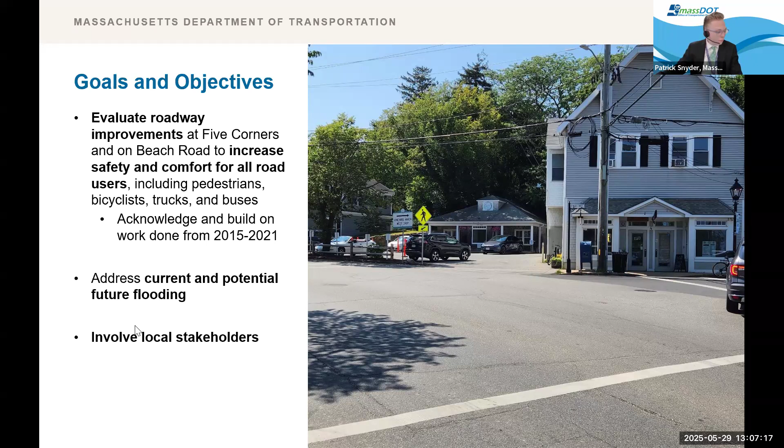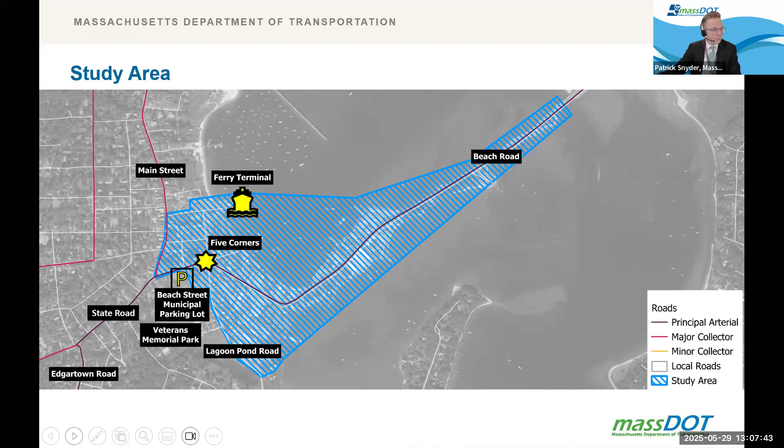We'd now like to review our initial flood vulnerability assessment. Based on our review, the existing drainage system at Five Corners is key to any flood mitigation work done at this location, as well as the current flooding that occurs there. Outfall pipes in the study area are located at Beach Street Extension, Lagoon Pond, Main Street, and Beach Road. These pipes form part of the stormwater management system by facilitating drainage off of streets and properties.

MassDOT and the town of Tisbury have identified challenges with the existing drainage system that make it difficult to manage stormwater. Low elevation, effectively at the current sea level, makes it vulnerable to storm surge. Flooding regularly occurs at Five Corners due to backup at the Beach Street Extension outfall pipe, as well as drainage that slopes toward Five Corners rather than coastal outfall points at Beach Street Extension, Beach Road.

The Beach Street Extension outfall pipe also gets blocked up during storm events, which contributes to backflow and more drainage challenges. MassDOT has proposed drainage improvements under our Highway Division project number 609459 - that's how we categorize our projects - to help mitigate stormwater at Five Corners and the current flooding that happens there. As you'll see on the following slides, stormwater challenges are exacerbated by future year flood vulnerability under climate change.

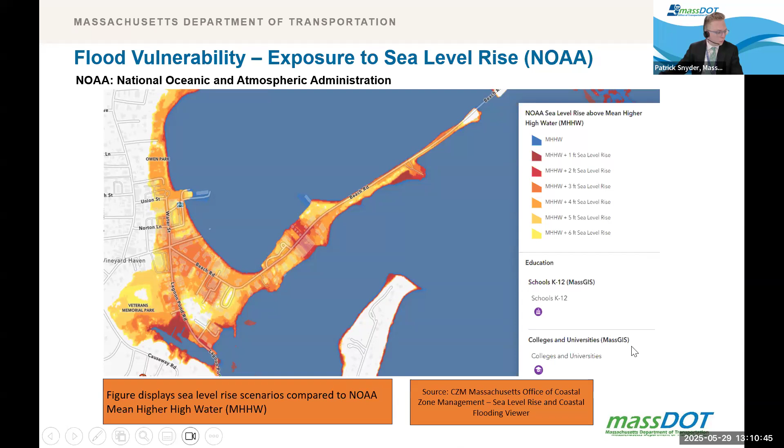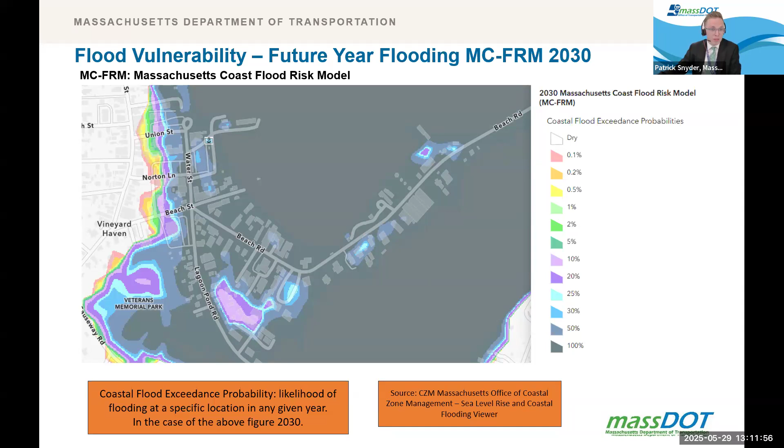Any potential future projects to address flooding in this area would likely require coordination with CZM, as this is a coastal area. Coastal flood exceedance probabilities shown in this figure are between 0.1% and 100%. Most of the study area is projected for 100% flood exceedance in the year 2030, meaning more significant flooding at Five Corners than already occurs, expanding across more of the study area - indicating that during a storm event, most of the study area will be flooded beyond the area it already floods today.

As part of this planning study, we carried out flood modeling in order to review potential horizon years to plan and develop concepts. Per direction, we used the Resilient Mass Action Team model, which is a risk screening tool developed as part of the state's resilience planning initiative, Resilient Mass.

RMAT, for short, is a preliminary risk screening tool that outputs results based on categories assigned to assets, such as their critical operation during emergency events. Assets being transportation infrastructure, buildings, and natural resources, to name a few. There are quite a few inputs that you can select.

Inputs to this tool for this study resulted in target planning horizons of 2030, 2050, and 2070. These are suggested planning years that RMAT suggests we take into account when we're planning for resilience and climate change.

Mean high water level, a measure that indicates the highest level water could reach for these years, was a minimum of 3.7 feet for sea level rise in the 2050 year as output by RMAT. And this would be during the highest high tides. It could be a little bit lower than that at times, but it's projected to be at 3.7 feet during the high tides in the 2050 year, normal high tides.

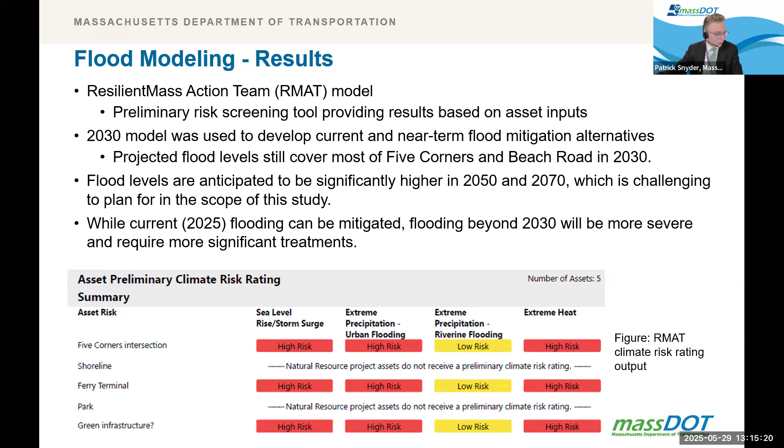At this point, I would like to pass it over to Joe Zissman from our consultant team at Cambridge Systematics to give an overview of the safety analysis, which helped inform subsequent alternatives analysis for roadway improvements in this study. Thank you, Patrick.

We analyzed crash data from the period between 2018 and 2022 for the study area. In that time, one fatal crash occurred: a nighttime head-on collision of two vehicles on Beach Road near the Lagoon Pond Bridge. Two injury-causing crashes have occurred at Five Corners, one involving a pedestrian, the other involving a bicyclist. The study area as a whole saw 18 additional injury-causing crashes.

Three clear crash clusters occurred in downtown Vineyard Haven between 2018 and 2022. The first was at Five Corners in the Lagoon Pond Road leg, the second on Water Street northbound at the access point to the ferry terminal, the third on Beach Street where it intersects the Cromwell Lane alleyway and the municipal parking lot.

Five Corners is designated a top crash location in Massachusetts, and a road safety audit was carried out at this location, which was a precursor to this study.

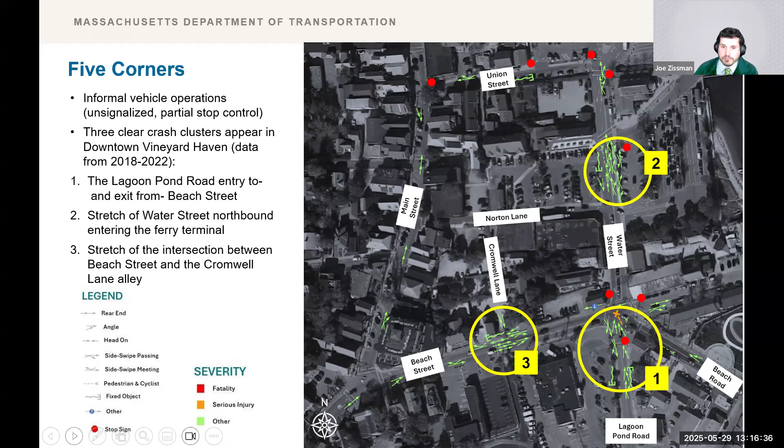The study area sees a large volume of pedestrian traffic. The village center is a business hub for those who visit Martha's Vineyard, live there, and work there. It has a ferry terminal with service to Woods Hole, the island's primary post office, a full-service grocery store, and the Black Dog Tavern, in addition to many other small businesses and a small number of residences.

Sidewalks and curb ramps are not always sufficient for pedestrians. Some are narrow or obstructed with poles. Brick sidewalks can be uneven for those with mobility challenges. Crosswalks and the ramps leading to them are not perpendicular to the road and are not clearly marked for accessibility. No pedestrian flashers or other pedestrian signals exist. Street lighting in the area generally is poor.

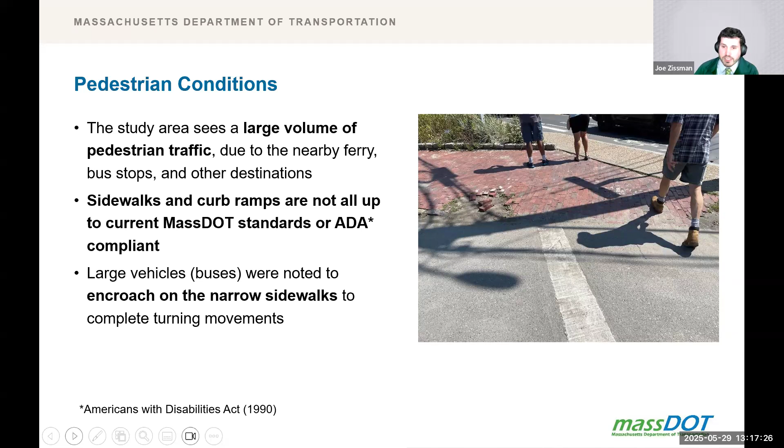Some of the turns are also too tight for the large trucks and buses accessing Water Street in particular, and we observed those vehicles when we were on site mounting the sidewalk in some cases, which is a dangerous situation for pedestrians. The study area also sees a large volume of bicycle traffic.

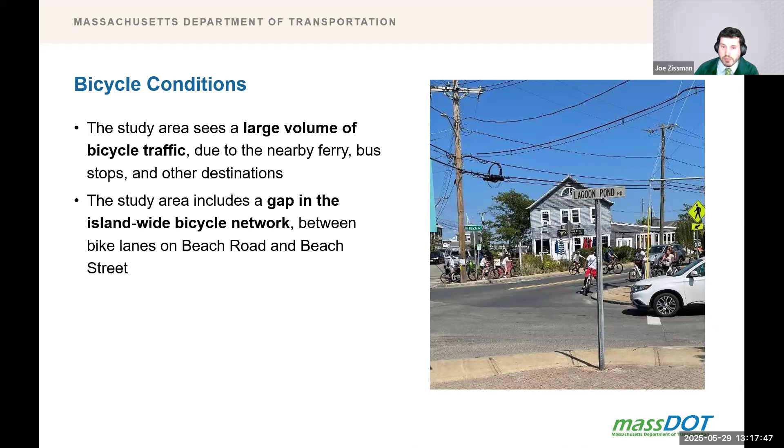This is driven not only by the destinations in the area, but also by the strong commitment from Martha's Vineyard communities to building a robust bicycle network. But a gap in that network exists in the study area. There's a missing link in the island-wide shared use path network between Oak Bluffs and Edgartown through Five Corners.

On the basis of this analysis, this study discusses high-level conceptual design alternatives for the study area. The alternatives have two components that mirror the two components of the analysis. The first, safety and road treatments, focuses on improving multimodal operations and safety, primarily through changes to roadway geometry, signage, and control. The second is adapting to and mitigating the impacts of near-term flooding.

While this study analyzed and considered long-term flooding, as Patrick mentioned, more significant analysis will be required as part of any project development. The conceptual design alternatives are presented as short-term, medium, and long-term. They consist of improvements at two locations: Five Corners, and Main Street and Beach Street. We'll present the alternatives for Five Corners first.

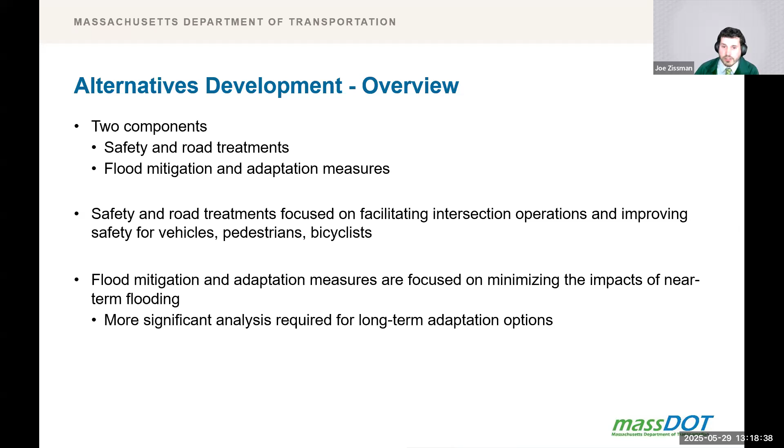The short-term alternative for Five Corners includes rebuilding sidewalks to be ADA compliant, including curbing and curb ramps with tactile strips, realigning crosswalks to be perpendicular with the street, repainting all crosswalks to improve visibility, installing indicator signs for crosswalks, potentially with rapid flashing beacons, and repainting stop lines on Lagoon Pond Road, Water Street, and Beach Street Extension.

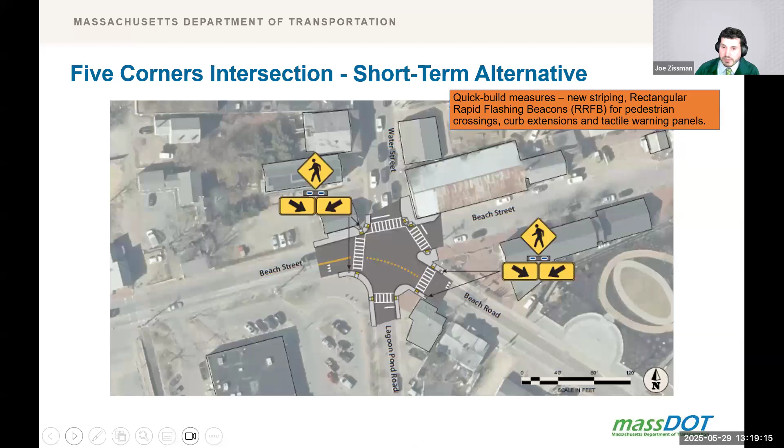Also included is painting new shark's teeth yield lines on approaches without stop signs, and painting a curving yellow line that connects the center lines of Beach Street and Beach Road. All of those are designed to be relatively low cost and implementable relatively quickly.

The medium-term alternative for Five Corners includes the low-cost, quick-build measures from the short-term alternative, but makes two substantial changes to roadway geometry. First, Water Street is narrowed from three lanes to two, which allows for the construction of a shared use path for pedestrians and bicyclists. Second, Beach Street Extension is raised and turned into a shared street for cars, pedestrians, and bikes - also known as a woonerf, which is a Dutch term.

The street would have pavers instead of an asphalt surface and would be accessed via a ramp-like sloping sidewalk from the level of the intersection. This has several benefits. First, it creates a clear physical through line from Beach Street to Beach Road and simplifies the apparent complexity of the intersection from five legs to four.

The raised surface also potentially allows for stormwater storage underneath Beach Street Extension and resloping of the outfall toward the end of the street to improve drainage. Access to Beach Street Extension would be maintained for all adjacent homes and businesses under this proposal - it would just appear less like a typical street and more like a driveway.

Two long-term alternatives were also developed for Five Corners: a stop-controlled intersection and a roundabout. The stop-controlled option differs from the prior alternatives by making more substantial changes to roadway geometry and alignment. Specifically, Lagoon Pond Road is curved, so the intersection becomes more perpendicular, resolving the current tight turning radius that brings trucks onto the sidewalk.

This alternative also includes a shared use path on the south side of Beach Street and Beach Road, which is accomplished by narrowing Beach Street to two formal lanes. This alternative may require additional right-of-way, which would be evaluated during project development.

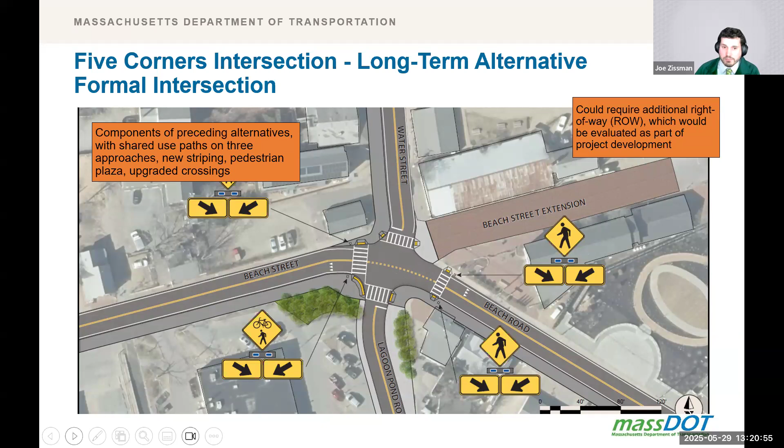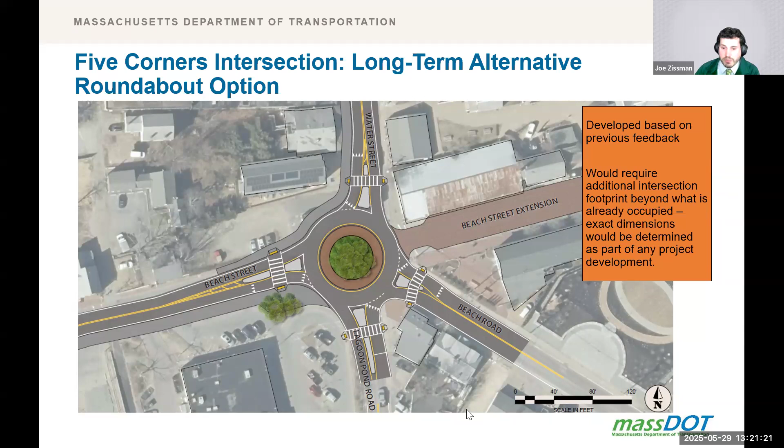A roundabout option at this location has been discussed in the past and would require substantial additional footprint beyond the current extent of Five Corners. What is shown on the screen is one possible location where a roundabout could be centered, but the center of that roundabout could be moved elsewhere in the general intersection vicinity. Note that the width of the Beach Road approach at the roundabout prevents the inclusion of the shared use path under this scheme on Beach Road.

A single set of improvements was developed for the intersection of Beach Street at Main Street and also State Road, consisting of quick build improvements to sidewalks, ramps, crosswalks, and roadway markings in much the same style as those at Five Corners. A long-term enhancement, which is not drawn, could extend the shared use path from the long-term Five Corners alternatives through this intersection on the south side of Beach Street and potentially onto State Road.

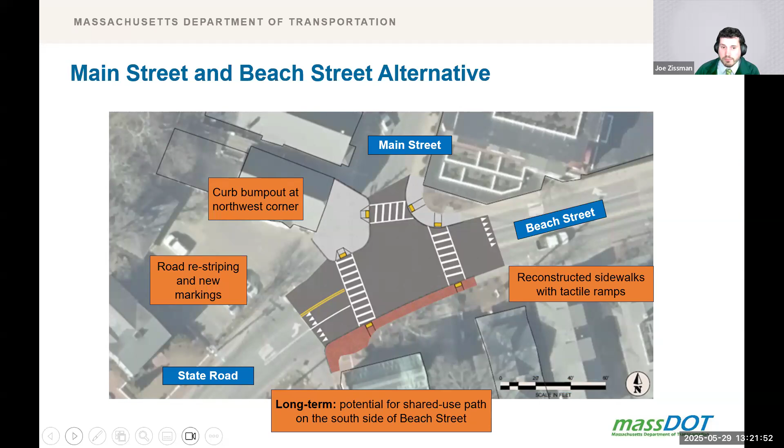Patrick will be taking you through the alternatives analysis, which includes a discussion of infrastructure elevation. Five Corners currently sits at approximately 2.5 feet above mean sea level, and that was mean sea level in 1988. It's also referred to as NAVD 88.

This study considered raising the intersection in the long term to either 5 feet above NAVD 88, which is 2.5 feet beyond the current level of the ground, or 5 feet above the current ground level, which is 7.5 feet above NAVD 88.

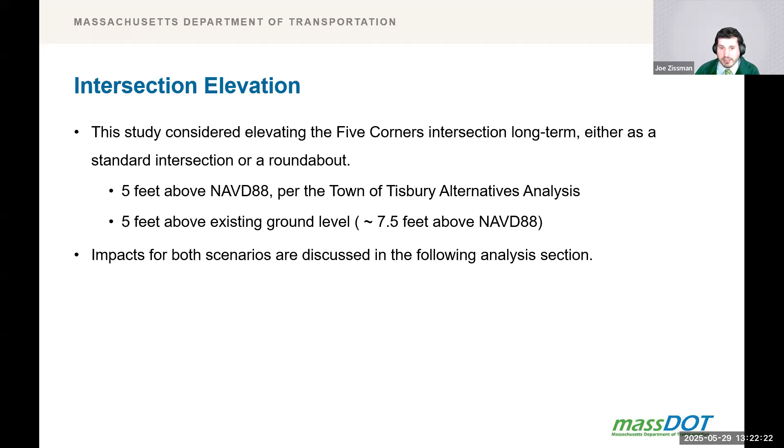So thank you, Joe, for taking us through those alternatives.

At this point, we'd like to review our alternatives analysis, which is an outline of anticipated roadway impacts, as well as wrapping in potential flood mitigation measures and discussing the effects of the flood projections that we reviewed.

In terms of anticipated impacts related to roadway elements, we've split these up amongst the short-term, midterm, and long-term alternatives.

When it comes to the short-term alternatives, these are anticipated to result in safety and operations improvements for pedestrians and vehicles at this intersection. They would upgrade Five Corners to current MassDOT standards and create new ADA-compliant pedestrian infrastructure.

Short-term alternatives would likely be insufficient to address the current turning radius challenges for large vehicles such as buses and large trucks. The short-term alternatives are conceptualized within existing right-of-way.

I'll note on this and the next slide that potential right-of-way impacts are fully evaluated later in the project development process, which would follow this planning study.

The midterm alternative for the Five Corners intersection is anticipated to have the same impacts as I listed for short term. The midterm alternative builds off of the short-term alternative with some additional improvements, a shared use path along Water Street, and a potential raised shared street at the Beach Street Extension, which would increase comfort and safety and an overall more welcoming environment for pedestrians and bicyclists.

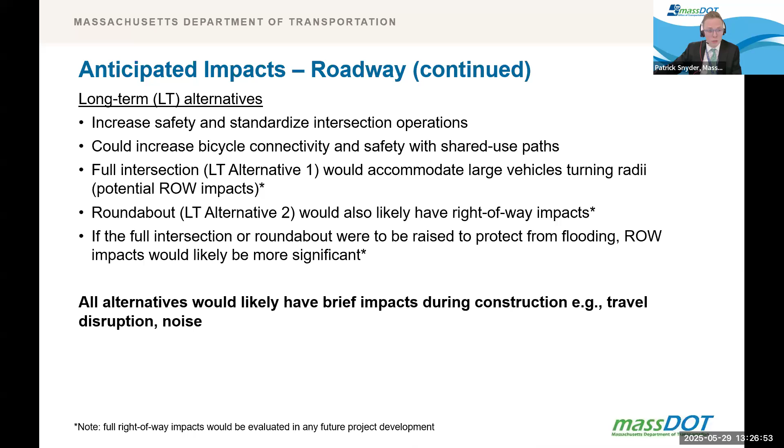As I mentioned on the last slide, there would likely be the typical temporary impacts associated with construction activities such as noise and access for the long-term alternatives as well.

Just to give an overview of potential costs, we've developed high-level summary cost estimates with unit costs based on 2024, 2025 dollars and based on historical MassDOT cost data. For purposes of estimation, the short-term improvements are assumed to be implemented later in 2025 and the midterm in 2027, just for purposes of the cost estimation.

Long-term alternatives did not assume a construction year as they are contingent on potentially incorporating flood mitigation measures, such as elevating the roads, and they do include contingency costs, however. These are all estimates and would be subject to change during any potential project development.

Going through the list of these numbers, the short-term improvements at Five Corners would possibly be around $322,000. Short-term improvements at Main Street, possibly $201,000. Midterm improvements at Five Corners, perhaps $2.3 million. Long-term roundabout is estimated at $3.8 million. And the long-term formal intersection would be somewhere between $1.8 million and $3.1 million.

That somewhat wider range is due to base level changes at Five Corners and potential improvements at Beach Street Extension, turning that into a woonerf shared street. So the lower end of that cost is the formalized intersection, no roundabout, and the higher end is if the midterm Beach Street Extension improvements were incorporated into that as well.

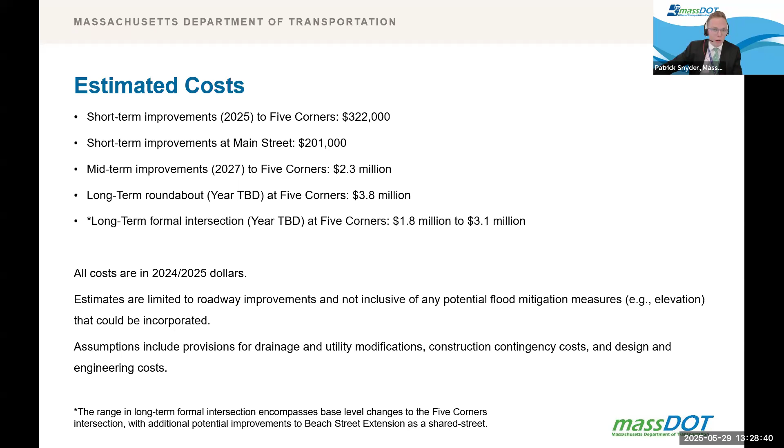Getting into the flooding side of things, we discussed a variety of flood mitigation measures as part of this study. This included a stormwater retention tank, potentially under Beach Street Extension or another location, perhaps under Five Corners itself, if Five Corners were to be raised.

We also discussed potentially elevating state-owned roadways. A stormwater retention tank in this area could provide storage capacity for floodwaters during storm events. The final location would need to be determined based on stakeholder consensus, necessary storage capacity, and would probably involve hydraulic analysis as well.

If Five Corners or Beach Street Extension were to be elevated, a retention tank could be placed under either or both of those roadways. Alongside this would probably come the need for a pump system, which would need to be maintained.

Because of the anticipated volumes of floodwaters and the severity of future year flooding that's projected, a stormwater tank might be insufficient and likely would not protect the larger, wider study area from wave action along the harbor line, which also contributes to exacerbated stormwater flooding and higher flood levels. Hydraulic analysis of those effects is outside this study's scope of work.

Along with the impacts of flooding itself, there would be temporary impacts from any construction, like noise, access issues, and possible detours. As part of any construction, there are construction-related impacts. There would also likely be right-of-way impacts to abutting properties if any infrastructure were to be elevated.

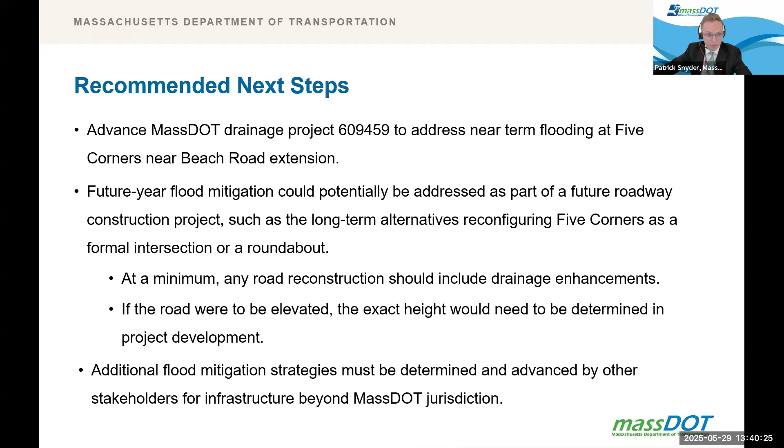In terms of what comes next: today was our third working group meeting of the study. In about two weeks, approximately June 10th, we'll have our second public meeting that evening, starting at 6:30 p.m.

Information is on the study website, and we'll give the same presentation to members of the public for their feedback.

Following that, we're going to work on organizing input on the alternatives and analyses from today's meeting, from the public meeting, and any comments received outside the meetings, to finalize study recommendations and organize next steps. Looking ahead, MassDOT will continue to coordinate with local partners.

At this point, we would like to open up the floor to discussion to you as working group members. If there are any members of the public attending today, know that you'll be able to speak after.

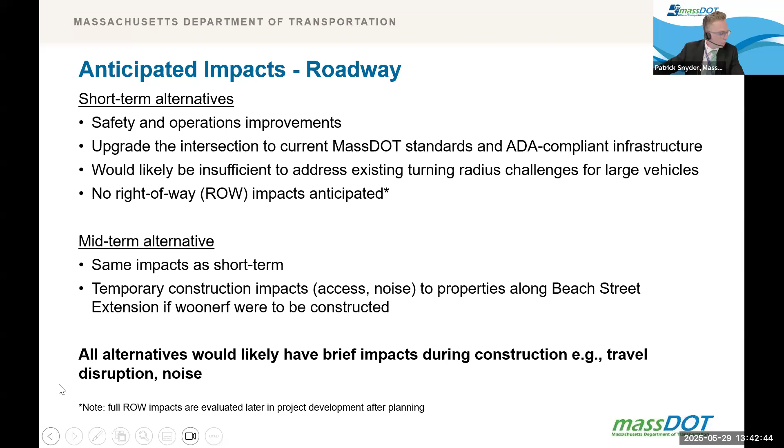This one here. So you guys are considering losing the turning lane on Water Street for the right-hand turn, which allows traffic going up-Island to make that turn and head up Beach Street instead of cars trying to turn across traffic to get to Oak Bluffs.

I think that might be problematic, especially at times when the Steamship Authority is offloading vessels and there's roughly a 50-50 split. There is an alternative route up Union Street to get up-Island, but most of the traffic flows out to Five Corners and wants to make that right-hand turn.

And if they're queued behind a car that needs to make the left-hand turn across traffic, it's going to lead to more blockage on Water Street. So I'm not sure if that makes sense. That's just one question.

Thank you. Globally, 2030 is right around the corner, and as a planning horizon for improvements, I think we're going to have to think a little bit beyond that.

Advancing the current project, part of it was utilizing town property at the old fire station lot for a retention area. There were problems identified by the state with that property. What does that look like for advancing given those issues? Is that the same as we understand it to be today?

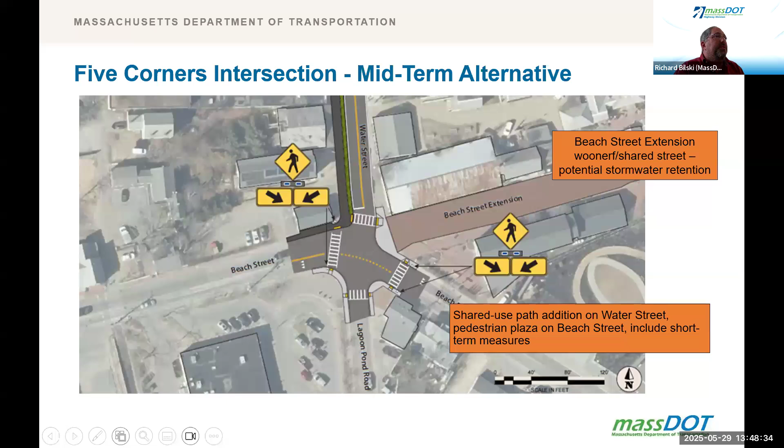Right, but if you don't raise Five Corners drainage, you can't really raise the retention above that. So that's where the coordination between a raised road next to it comes in, unless you're going to have the pump system that you guys have talked about. Personally, I think we would probably do it hand in hand, and as Pat was saying, it all depends on to what degree we think is achievable and reasonable. So maybe there's something like a smaller number that could be achieved.

So the Five Corners was raised in relation to the Beach Street extension. I don't know what that number is. As we develop a design, we could determine what that is, the ideal spot, somewhere between zero and what would be acceptable without being overly invasive on adjacent properties.

One past planning exercise the town did in 2022, we were looking at Water Street, Lagoon Pond Road, NAVD, raising it to 6 NAVD as a target elevation. In some places that's 18 inches, in some places it's 2 feet, but it's significant. That was sort of the planning target at that point to build some resilience to flooding. Right, and you could do that just based on the projections that we reviewed in this study.

If we think about it in terms of opportunity cost, you can do that, and that would help in the nearer term. But looking out at 2050, 2070, you're going to end up in the same place with more flooding on top of that 5 to 6 foot elevation, you would need to elevate it higher to a point where there would be more substantial impacts.

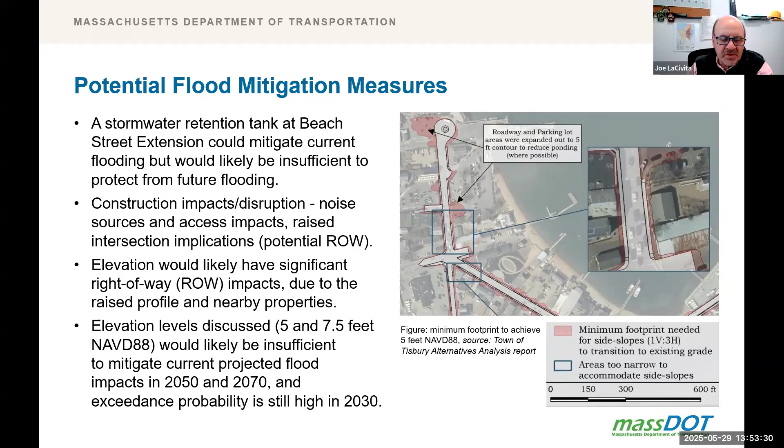Ben, you bring up great points, and some of these we discussed yesterday with Patrick and Richard. I had a preliminary conversation to express Tisbury's support in these projects and concerns along the way. One of the sites that we own is the former firehouse area, and I think we as a township have to move forward in finding funding, whether state or federal, to really look at how bad that site is, because I think it becomes a pivotal site that could be used in the future for any upstream water. But again, you bring up great points, they were all talking points we had yesterday as well.

I think MassDOT said it together, it's going to take all the stakeholders to be involved with this as we go forward, and our commitment from the town is certainly there, and it has been expressed.

Thanks, Joe. You made me think of something, Ben, you alluded to this as well, that I'd like to briefly speak to. When we talk about our drainage project, 609459 at MassDOT, flooding is a consistent problem at Five Corners now. It's been going on for years, and it continues as sea levels rise and storms get more severe and more frequent. The flooding is going to get worse. On our side at MassDOT, in terms of a near-term recommendation to address that current flooding, we have something already teed up and somewhat ready to go quicker than any long-term solution that, as a larger group with Tisbury and other stakeholders, we still need to talk about. That drainage project is teed up to try and address the current flooding to the extent that it can.

James, it looked like you wanted to jump in. Thanks for being here, sorry, I can't find my hand for some reason, but that's okay. Thanks for the opportunity.

I think there's probably an interest in other parties that aren't here too, to continue this dialogue and partnership, because we kind of started this with District 5 in 2017. We had designs on the fire station location, one of the things that culminated in a report in 2019 with the recommendations that were moved forward.

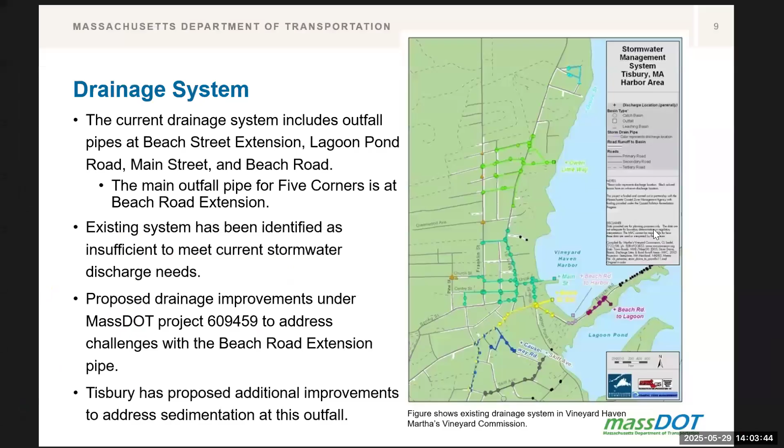Could you put page 9 up, showing the existing drainage system, so everyone can understand where this connection point is. If you look at the gap between the yellow and the green on Main Street, if you take the load coming down State Road at Main Street and branch over, you could dump into the Union Street system from the State Road system, yellow to green. You can see there's a gap there. We were saying there's a big rise, and we had to do a really deep cut to get through there. I think the small gap between the yellow and the teal or green is Main Street. Yes, that's Main Street.

I'm going to step in with a clarifying question to make sure we're all on the same page, using my hands as a demonstration. Hung, it sounds like what you're saying is that because of that gradient on Union Street, you'd have to raise all of that and maybe end up raising Five Corners as well, which brings us back to those larger right-of-way impacts as well as this being outside our jurisdiction.

No, Union Street is on—let me clarify. The connecting road between Beach Street and Union Street is Main Street. So there's that small gap between the yellow and the teal or green—that's Main Street. In order to connect to that system, we need to trench on Main Street, and the trench is very, very deep. But that wouldn't necessarily address the low level and the drainage at the Five Corners intersection. That would divert a percentage—don't know what the percentage is—of the water at that higher level, but not the water down by Five Corners. It would prevent runoff, but it wouldn't address all of it.

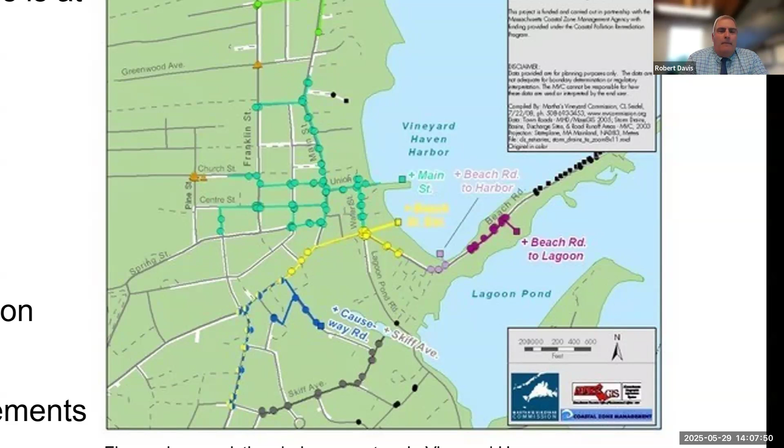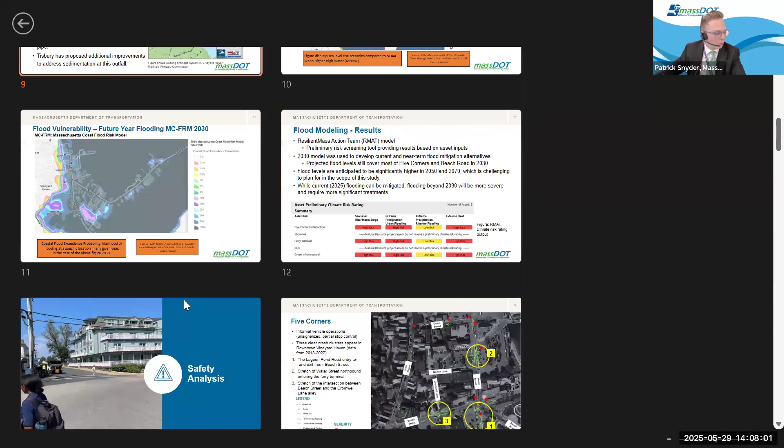So thank you. In terms of the larger scope of things here, other things that we reviewed today, is there additional feedback anyone would like to share, clarifying questions? I know we have other working group members on the call as well.

Ben, do you want to go ahead? And for anyone else, if you're not comfortable speaking verbally, you're also welcome to put things in the question and answer box at the bottom, and I can read them out loud.

Go ahead, Ben. Thanks, I just wanted to get a little more on the bike circulation for this intersection. You talked about some of the intersection improvements, but how does that marry into broader bike circulation? Because we recently had a MassDOT project that put bike lanes in the road, but not a shared use path. Did that satisfy MassDOT for getting bikes from Oak Bluffs at least to Five Corners?

Well, Ben, originally there was going to be a shared use path as part of that project. I know, I wish there was a shared use path, but I'm talking about what we ended up with. Well, I don't know, Rich, do you want to speak to it first?

For reasons outside MassDOT's control, we weren't able to install the shared use path as part of the Beach Road project. So basically we have on-road facilities right now, and I don't see any way that can be addressed at this time on the Beach Road section that was already reconstructed. As far as Water Street, I think that depends on further study - whether it's short term or long term, and how much room we have to work with.

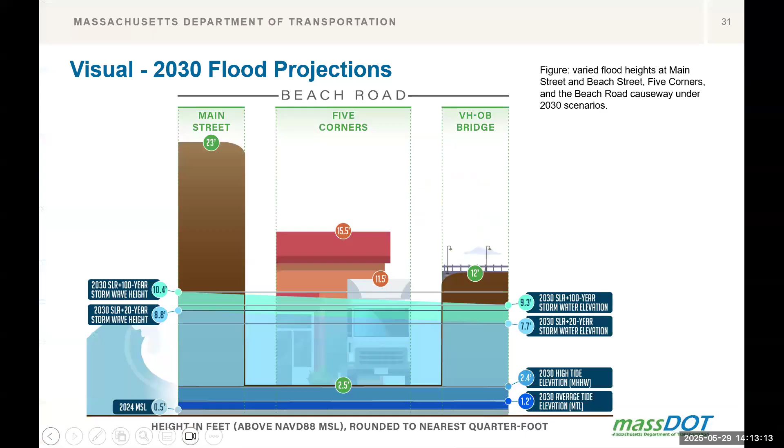That's something we're still working on figuring out. We're deciding what's going to move forward based on your feedback, and how things shake out from a MassDOT project development perspective. On the other side of this, the flooding, and there are projections for future flooding, thinking back to those maps with those scenarios. At this time, the decision has not been made to put anything forward into the project development process, because that's not the point we're at. But we have these projected flood impacts that are expected to get worse, and on the property owner side of things, this is also a consideration.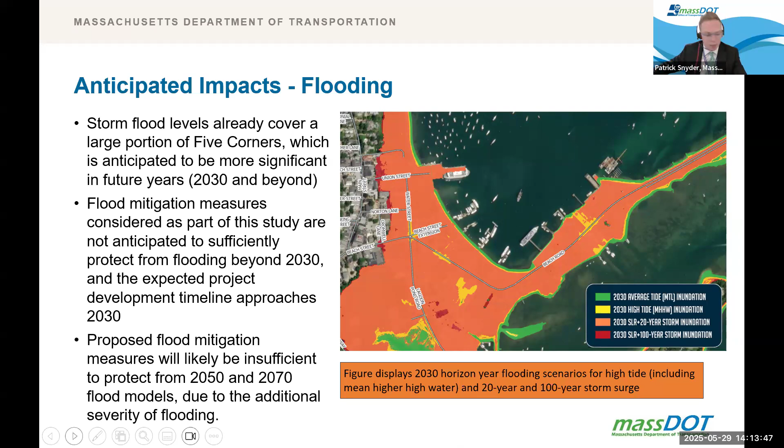We can certainly keep talking, but mindful of people's time, and in recognition that there might be members of the public on the call today, I would open up the larger floor at this point to questions or comments from everybody on this meeting.